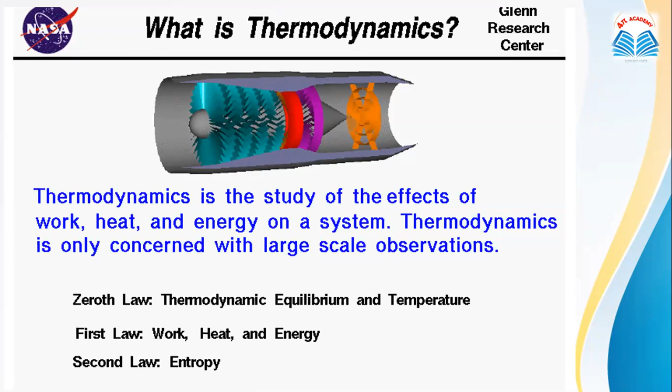So first of all, what is thermodynamics? Basically, we know that thermodynamics is that subject in which we deal with the temperature, work, heat, energy of system, etc. And we study three laws of thermodynamics: zeroth law, first law, and second law. But thermodynamics is not just this. Thermodynamics is a vast area in which we can study all about the molecules, all about their kinetics, all about the heat, all about the temperature, all about their thermodynamic function, and so on.

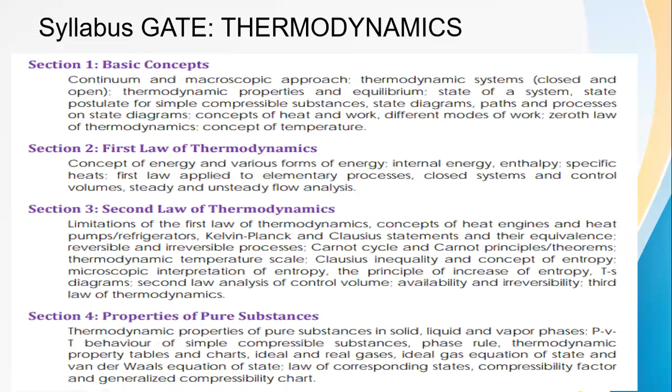And this is the syllabus of GATE, in which there are sections divided: some basic concepts, then laws of thermodynamics, then properties, then thermodynamic relations, and then thermodynamic cycles and ideal gas mixtures. So these are some topics for the exam of GATE. So basically this is the total syllabus.

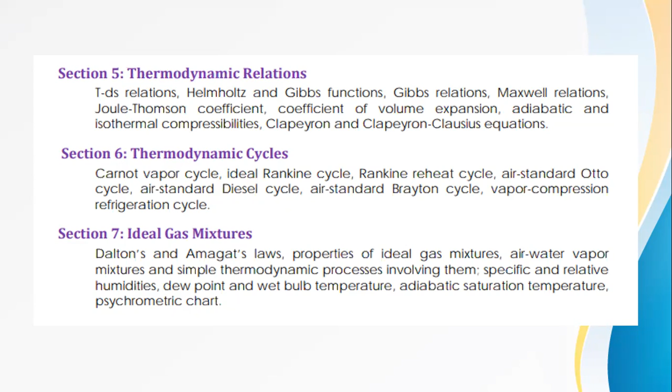Okay, so we will start with the basics of thermodynamics. Thermodynamics is based only on three things: heat, temperature, and work. So basically, heat and temperature are two different things. Some people can say temperature is a type of heat, or heat can be correlated by temperature, but no, it is not like that.

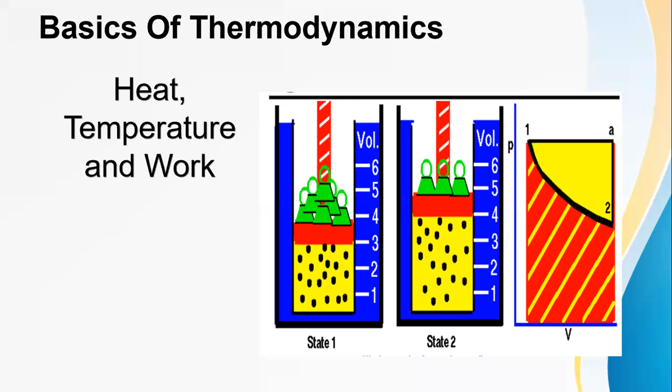Heat and temperature are very different things. So let's know how. Mechanics is a branch of physics in which we study velocity, acceleration, energy, momentum, position, etc. But we never study in mechanics about temperature or temperature function, or about diamagnetic or magnetizing behavior due to temperature and heat, and types of heat generation, heat transferring, etc. So mechanics is a different branch and thermodynamics is a different branch.

Both are parts of classical physics. Classical means the physics which Newton used to follow, Sir Newton used to follow.

Okay, so a question is, what happens to the energy of a ball when we drop it on the floor? You guys know that a ball has its energy and when we are dropping it, it has kinetic energy. But when it's stuck to the floor, where has the energy gone? What happened to the energy of the ball? So the answer is it goes into heat energy. The kinetic energy is converted, and when the ball is stuck to the floor, some heat energy is generated.

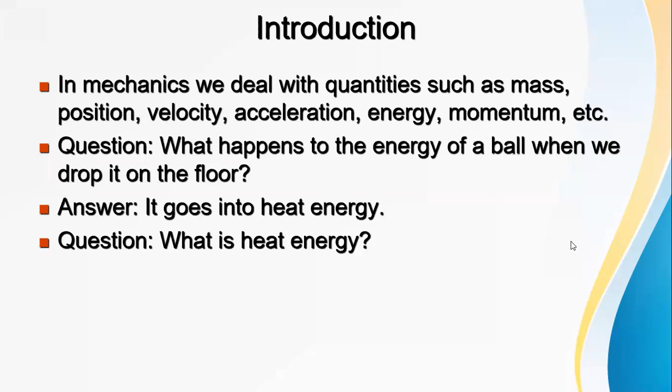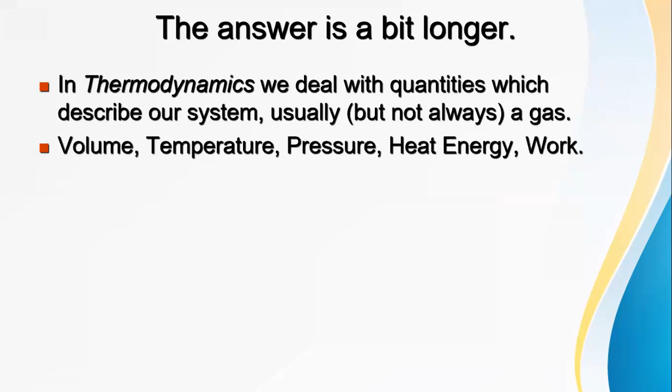So now another question arises, what is heat energy? The answer is a bit longer. Heat energy is the energy on which the whole of thermodynamics is situated. In thermodynamics, we deal with quantities like volume, temperature, pressure, heat energy, and work. So temperature and heat are two different things, as I told you earlier.

An example to explain this: maybe you guys have used a microwave oven. When you put your hand in the oven, in the hot air of the oven, your hand is not burned, but when you touch that metal rack of the oven, your hand instantly gets burned. So what is this? It means both are at the same temperature, the air in the oven and the metal rack in the oven. But when you touch the air, your hand is not burning, and when you touch the metal rack, your hand is burning.

So the answer is that they have really different energy contents. They have different powers of energy absorbing. They have different types of kinetic energy of molecules due to heat. And though the air comparatively looks cool to the hands than metal, right? And that is why this is happening.

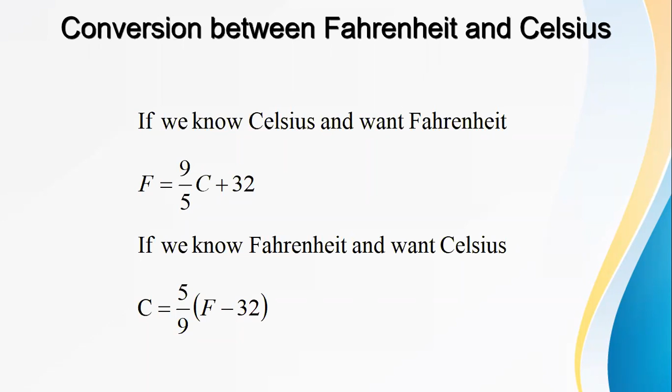So this you already know, conversion between Fahrenheit and Celsius. These are two temperature scale measurements. So some formulas are there. If we know Celsius and want Fahrenheit, then F equals 9C by 5 plus 32, and vice versa.

Now about absolute or Kelvin scale. What is absolute or Kelvin scale? The lowest possible temperature on the Celsius scale is minus 273 degrees Celsius. That minus 273 degrees Celsius is the Kelvin scale, which is 0 Kelvin or absolute zero. So in degrees it is minus 273 degrees Celsius, and in Kelvin it is 0 Kelvin. So basically absolute or Kelvin scale corresponds to minus 273 degrees Celsius.

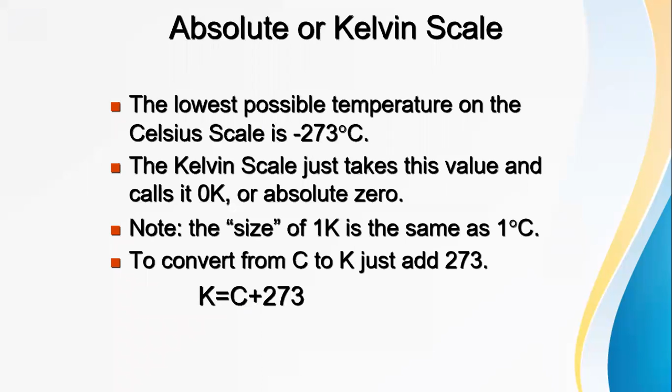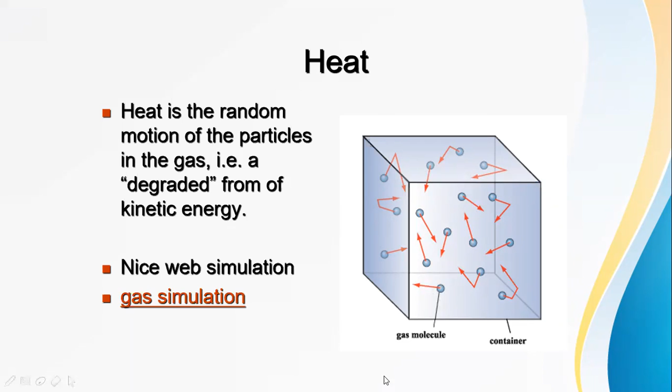So basically, in thermodynamics, we deal with gas molecules only. This is a schematic diagram of a container having gaseous molecules. So how can heat be transferred? There are three mechanisms of heat transfer: conduction, convection, and radiation.

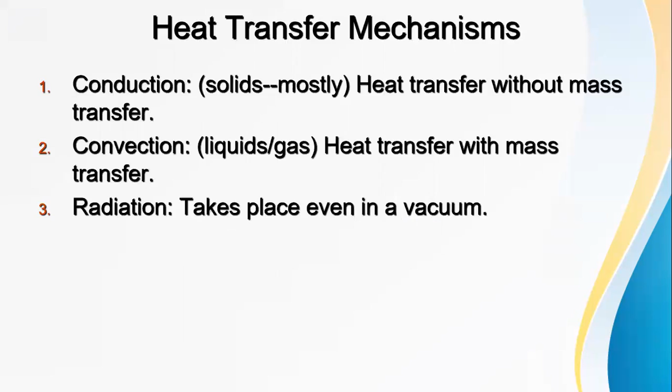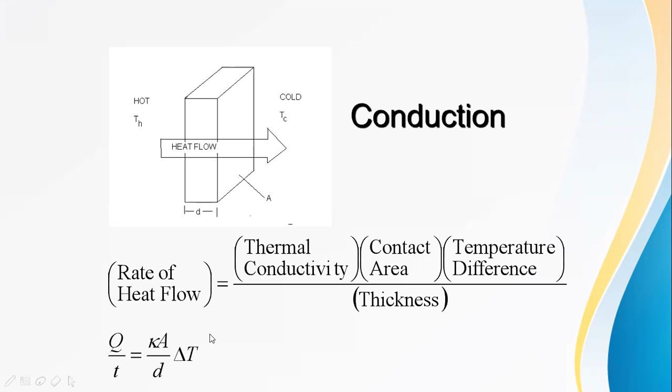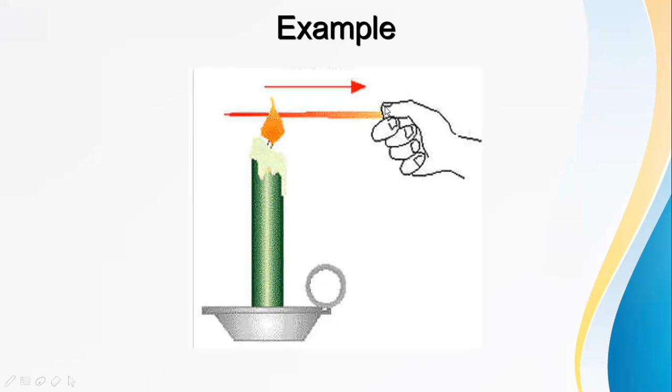So the rate of heat flow has the formula: thermal conductivity into contact area into temperature difference, over thickness. So Q over T equals K A delta T over D. This is conduction, and here is the simplest example: when you light a candle and put a metal rod from one side into the flame, it gets hotter and hotter, and after some time the other side also gets hot. This is the simplest example of conduction.

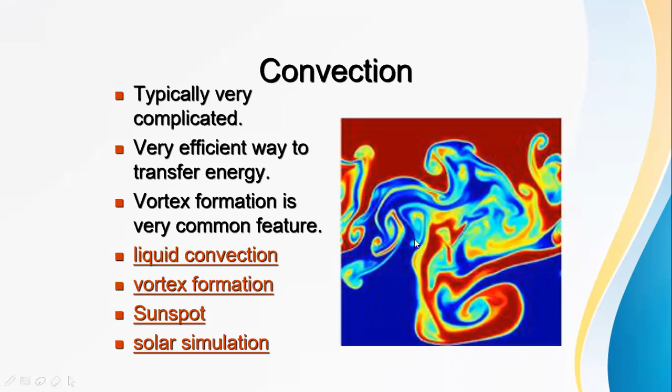Next is convection. Convection has a typically complicated formula because we can't see convection happening directly. Convection is basically seen in liquid convection, vortex formation, sunspots, solar simulations, and from these examples you can understand that convection is a typically complicated phenomenon. What is convection? Let's understand with some examples.

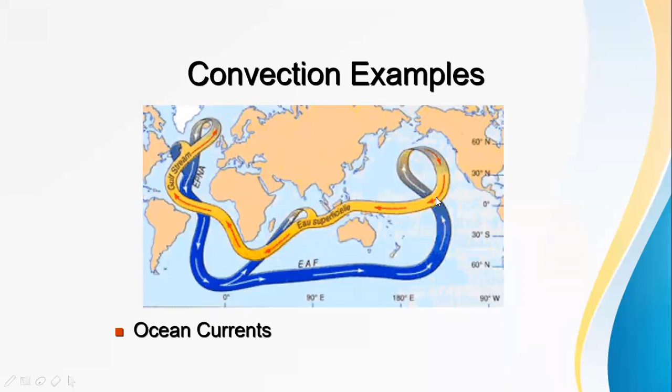Okay, so the next one is radiation. We know conduction, we know convection, now let's read about radiation. Radiation is the basic phenomenon in which everything radiates energy, maybe in the form of temperature, maybe in the form of fire, maybe in the form of light — everything that radiates energy is called radiation. So the method by which energy from the sun reaches the earth is radiation. The simplest example of radiation is sunlight reaching the earth through radiation.

Ma'am? Yes. Ma'am, one general doubt. Yes. Ma'am, suppose for example I take a material — at what temperature does it radiate its energy? What temperature, ma'am?

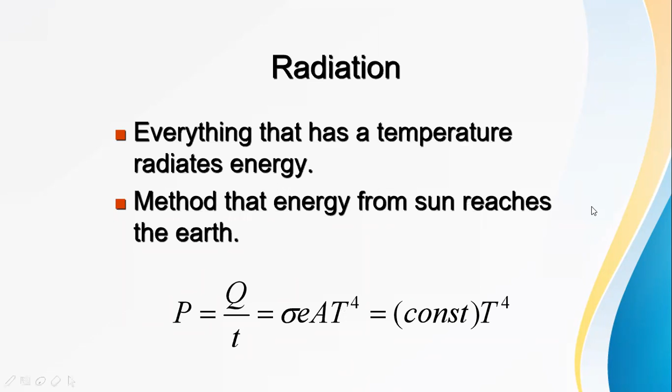The rest of you guys can see the screen, right? Yeah, we can see this. Not an issue. Yes, ma'am, we can see.

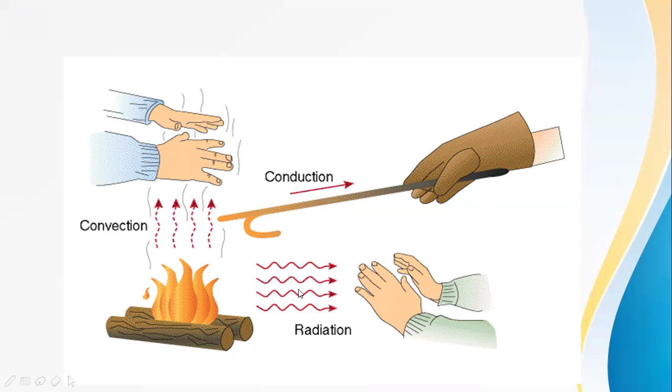So in this screen, now you can see all three in one frame. This is convection, this is conduction, and this is radiation. So now you can understand the difference between these three.

Next, let's move to the next topic. Our topic is isolated, closed, and open systems.

So what is an isolated system? In my language, an isolated system is like a box of wood. When we put a box of wood in sun heat and put some chocolate inside, the chocolate will not melt for a long while, because the box of wood absorbs comparatively less sunlight. Instead, when we put a box of steel with chocolate inside it in the sunlight, the chocolate starts melting soon.

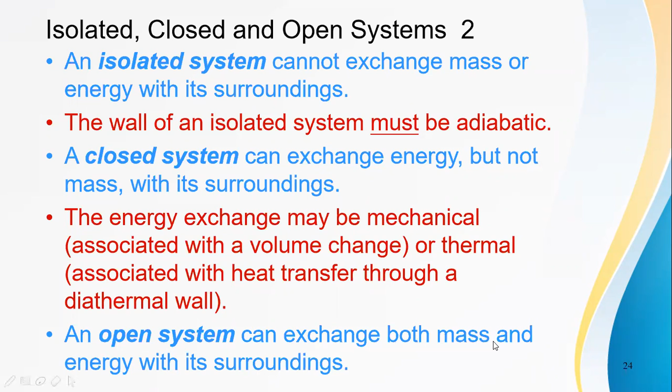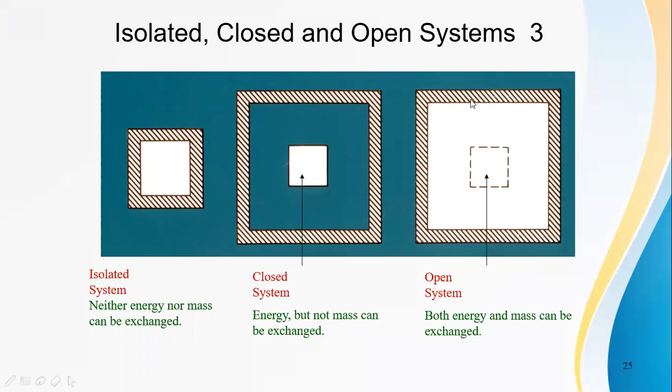Okay, let's learn thermodynamics. First, studying about the zeroth law of thermodynamics, thermal equilibrium. Thermal equilibrium is when warm and cool objects are placed in thermal contact, it is like a state of constant heat or temperature.

Based upon that thermal equilibrium, what we are doing in this law: we have three systems A, B, and C, or three objects having temperature A, temperature B, and temperature C. When two objects A and B are at equilibrium, and A is also in equilibrium with C, then automatically object B will be in thermal equilibrium with C. So this is the basics of the zeroth law.

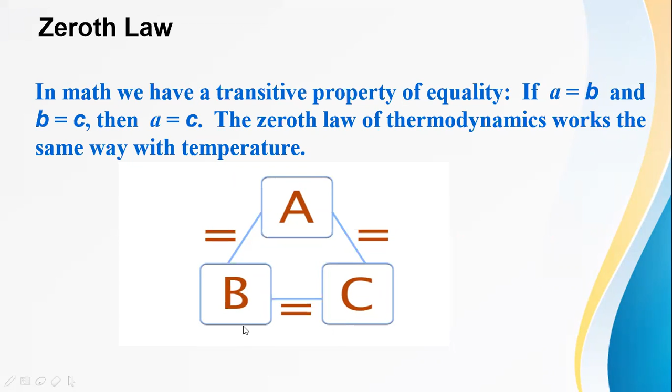What is it saying? It is saying if object A is having thermal equilibrium with B, and A is also having thermal equilibrium with another system C, then B and C will automatically be in thermal equilibrium with each other. So the zeroth law of thermodynamics works the same way with temperature. This is the phenomena of temperature.

Some thermodynamic variables we will study now because we are moving ahead to the first law of thermodynamics. Before studying the first law, we should know there are some macroscopic or microscopic variables. The main variables are P, V, and T. The whole of thermodynamics depends upon pressure, volume, and temperature. If these variables are used to describe an equilibrium state of a system, they are known as state variables. So pressure, volume, and temperature are state variables, because we use them to describe an equilibrium state of any system.

There are two types of variables: extensive and intensive. Extensive variables depend on the size of the system, like mass, volume, entropy, etc. Intensive variables do not depend on the size of the system, like pressure, temperature, magnetic field, etc.

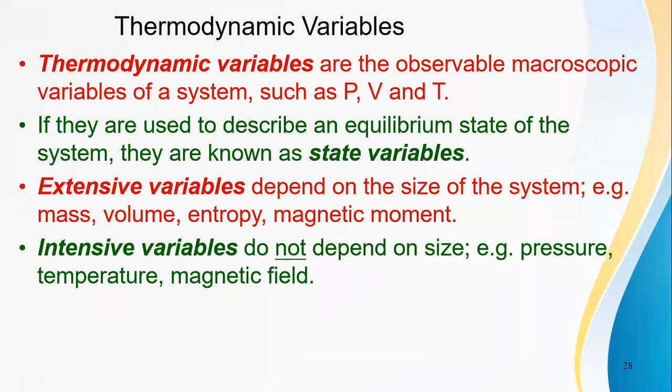And there are three types of processes also: isothermal process, adiabatic process, and free expansion. First of all, what is an isothermal process? There are some more processes also, I will tell you later.

What is an isothermal process? It is a process in which temperature is constant. We put some gas in a heat bath or reservoir at any temperature, and we do not increase or decrease its temperature. So this is called an isothermal process.

Adiabatic process is when we are increasing the pressure on the gas using a piston, so the gas is compressing. This type of process is called an adiabatic process.

Adiabatic expansion is when, by lowering the temperature, the gas is expanding, but there is no relation with its surroundings - the system is totally insulated. So this is adiabatic expansion. These are the three main types of processes.

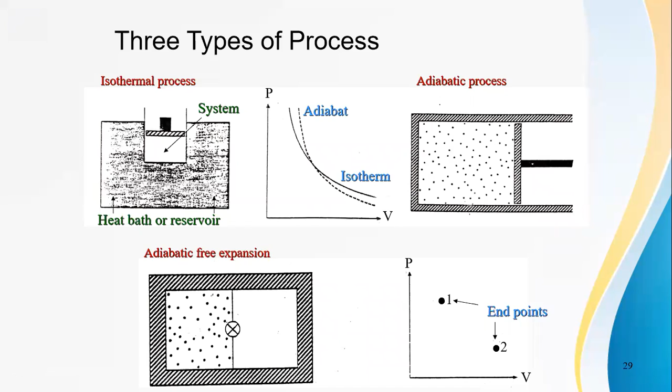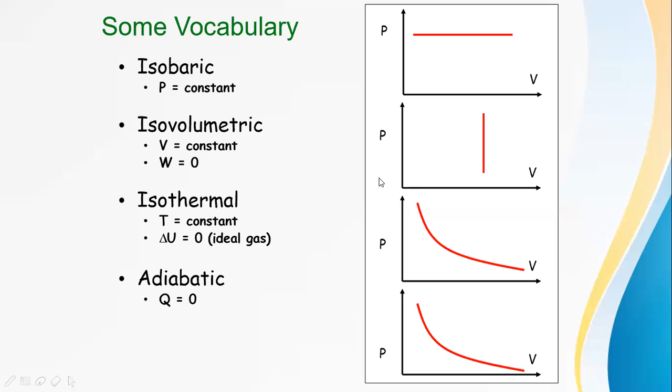Ma'am, your voice is not clear. Guys, can you hear Monica ma'am? Yes, yes ma'am, there's so much distortion in your voice. It's not audible, ma'am. Okay.

PV diagrams. Okay, let me make you understand these diagrams. When work is done by the gas, W by the gas is the area under the curve, meaning the path moves to the right, from this side to this side. Okay, this is work by the gas.

And when work is done on the gas, the path moves to the left, meaning minus the area under the curve. So we move from this side to this side, downwards. So basically, work on the gas equals minus work by the gas. We should keep this in mind.

Now, work from closed cycles: when the cycle is clockwise, meaning from A to B and B to A, then this area should be this blue circle side. This is a clockwise cycle.

Then work is positive. When we move counterclockwise from A to B and B to A, then work is negative, meaning negative of the area. And when we talk about closed cycles, the change in internal energy will always be zero.

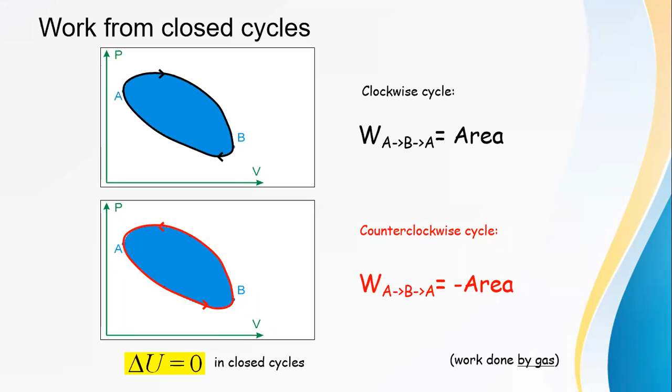So change in internal energy is zero in a closed cycle, whether it is work done by the gas or work done on the gas. So here is example A. Consider an ideal gas undergoing the trajectory shown in the PV diagram. Going from A to B to C, the work done by the gas is: greater than 0, less than 0, or equal to 0? What should come here?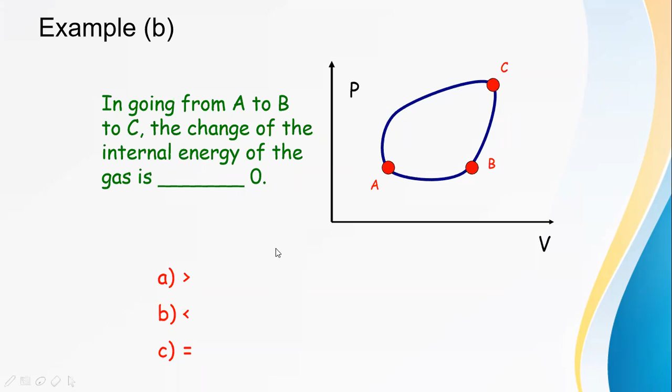Okay, another example: going from A to B to C, the change in internal energy of the gas is greater than 0, less than 0, or equal to 0? Greater than 0. Good, good, let's move ahead.

Now, internal energy in a cyclic thermodynamic process is always equal to 0.

Okay, now let us talk about the sign convention of thermodynamic work, and work in various processes - we will derive work in isobaric, isochoric, and isothermal processes.

Now you guys know that work done by the system is positive, and work done on the system is negative. In a cyclic process, clockwise we consider positive work, and anticlockwise we consider negative work.

Now, a reversible isochoric process gives work equal to 0. Why? Because in an isochoric process, volume is constant, so change in volume should be 0. And since W equals P dV, pressure times change in volume, when change in volume is 0, work is also 0.

Next is the isobaric process. Here we write work as W equals P delta V, meaning P times (V2 minus V1), going from higher volume to lower volume while pressure stays the same. So it's P(V2 - V1), and these results hold for all materials, whether it is plastic, steel, iron, or whatever.

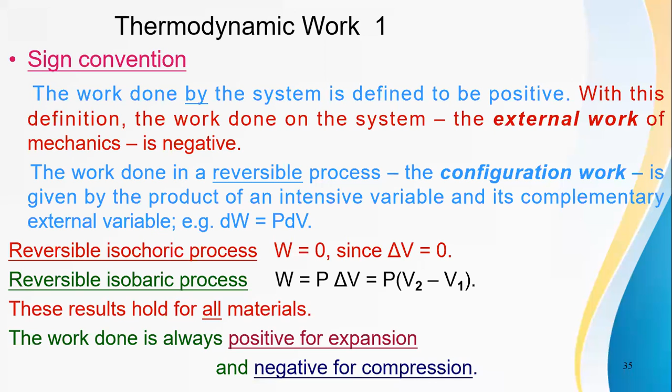Work done is always positive for expansion. When gas is expanding, we consider the work done as positive. And it is negative for compression. When gas is compressing, we consider the work done as negative.

Now we will talk about the isobaric process from this diagram. This is P, and isobaric process is happening, so we will write W equals to P(V2 minus V1). This is V2, the higher one, and this is V1.

Now when we talk about the isothermal process, it looks like this slope on the graph. The total area covered is the work done in the isothermal process. So the expression for work in isothermal process is W equals integral of P dV, equals to nRT integral of dV over V.

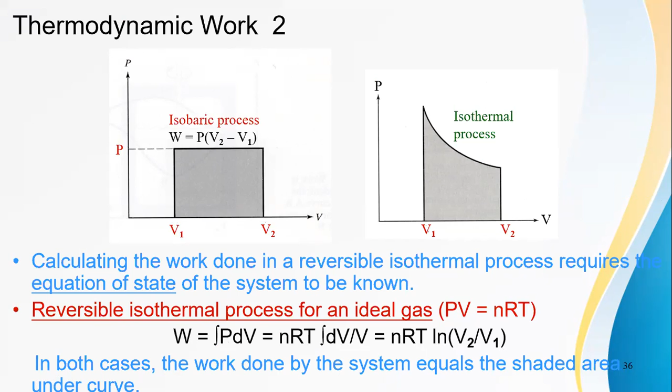Why am I writing P dV as this? Because P equals nRT upon V, from the ideal gas state equation PV equals nRT. So this becomes nRT, and integrating 1 over V with respect to volume, we get ln(V2 over V1). So this is the work done for the isothermal process, for ideal gases.

Let's move ahead to example number C. Quickly reply with these answers. We are considering a monoatomic ideal gas, with the gas state equation PV equals nRT. Just consider n equals to 1.

What work was done by the gas from A to B? This is point A, this is point B, and when we talk about A to B, the whole area covered by A to B is the total work done. So can anyone tell me the answer for part A?

Let me solve this here. We will consider this whole area, from here to here, and apply the simplest method: just subtract 75 and 25, which gives us 50. So we get our pressure, which is 50 kilopascal. And P delta V: delta V is the change in volume, which is 0.6 minus 0.2, that is 0.4. When you multiply this, you get 20, which is 20 kilopascal meter cube. Pascal into meter cube is joule.

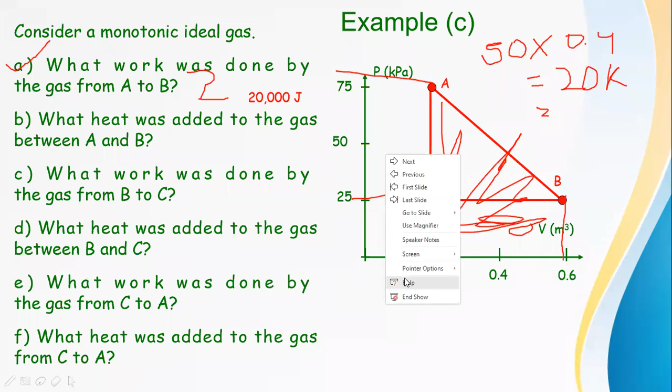Yes ma'am, very well. Okay, now what heat was added to the gas between A and B? Students, when the examiner asks for the heat added to the gas, the answer will be the same as the work done. So the work done is 20,000 joule, so the heat added will also be 20,000 joule.

Now for part C: what work was done by the gas from B to C? Just tell me the answer quickly. Ma'am, I think it's 10,000 joule. Okay, next D: minus 10. Ma'am, it's also 10,000 joule.

I think heat added is the same as work done. No, that's not correct, because A to B is an isothermal process and B to C is an isobaric process. Sorry, let me write down all the answers. You will work through these after I provide the same PDF to you, and the recording of the lecture will also be provided so you can see these answers later.

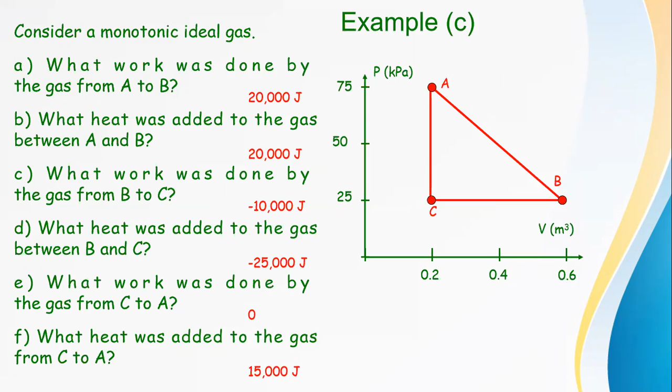Now let's move to the next slide, two questions are left. What was the total work done by the gas in the cycle? So total work done will be derived from A to B, then B to C, then C to A, and we add them all to get 10,000 joule.

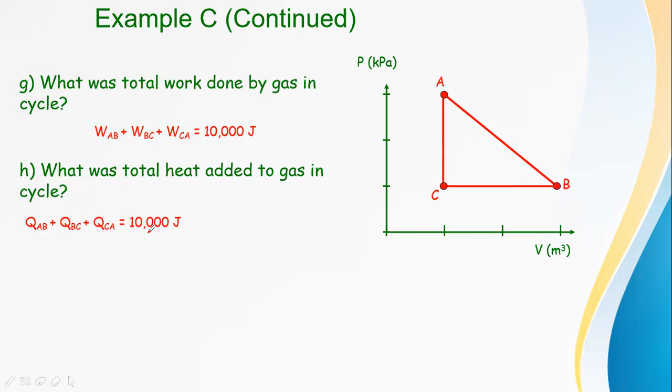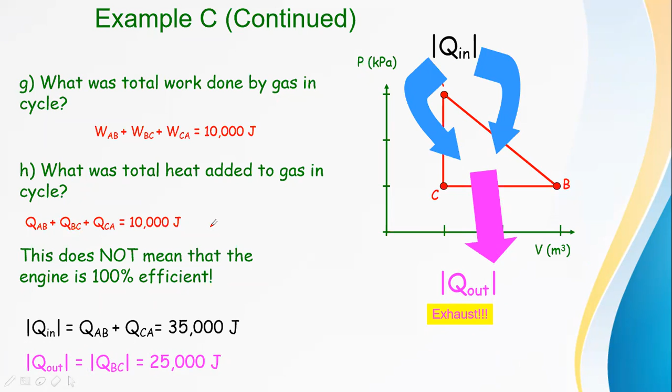And for total heat added, we do the same: Q(A to B) plus Q(B to C) plus Q(C to A). How do we know if heat is added or absorbed? We give heat in through process A to B, but from B to C, heat is coming out. So we are getting Q in equals to 35,000 joule, Q out equals to 25,000 joule, and thus the total heat will be 10,000 joule only. I guess you guys understand this phenomenon.

Now, work done by the gas. Basically, work is force into distance, so force into the distance covered by this force is work. Force is pressure into area, so pressure is P, area is A into delta Y, where delta Y is the mean length changed. So A delta Y becomes delta V, and what we get is W equals to P delta V. So this expression is coming from here.

Let's move to the first law of thermodynamics. The first law of thermodynamics is Q equals to delta U plus W. Change in internal energy plus work done is equal to the total heat. This is the first law of thermodynamics.

So in the first law, we will use the differential form only, because we will apply this differential form in many phenomena in thermodynamics. The differential form of the first law is dU equals to dQ minus dW. These dU, dQ, dW are differentials, and dU is an exact differential because U is a state variable. dQ and dW are inexact differentials because Q and W are not state variables. I've told you this thing earlier. These are some exact differentials and so on.

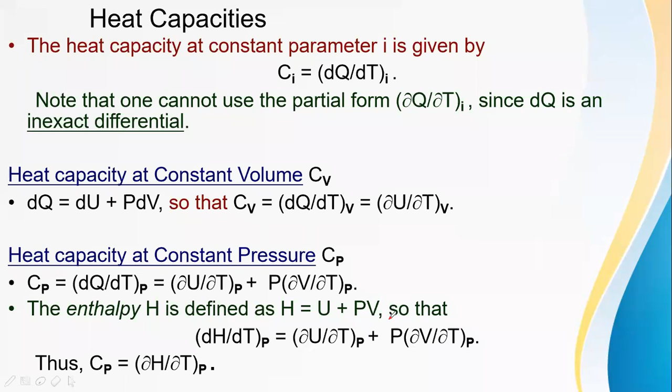Heat capacity at constant pressure is Cp. Cp is dq over dT at constant pressure, and enthalpy is H equals to U plus PV. So enthalpy, entropy, these things we will study later.

So we know about two specific heats, Cp and Cv, and the ratio of these specific heats is gamma equals to Cp upon Cv. For a reversible process, dU is dq minus PdV, and for an adiabatic process, we know dq equals to 0, so this dq is gone. So dU equals to minus PdV.

All these things are for ideal gases. We are considering the gas as an ideal gas. So for an ideal gas, U equals to U of T, because internal energy is a function of temperature, so Cv equals to dU over dT.

Now PV equals to nRT, and H equals to U plus PV. So U is a function of temperature, and P and V are state variables, so enthalpy will also be a function of temperature. So H equals to H of T.

So what can Cp be? Cp also can be dH over dT. This is the Mayer relation, which you guys have studied in the 11th standard. Cp minus Cv equals to nR, which is known as the Mayer equation.

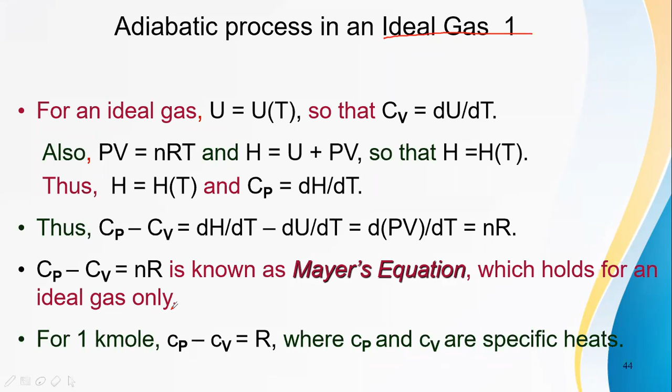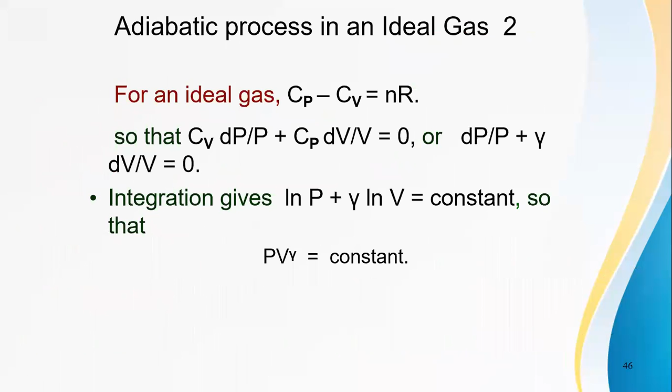And this also holds for an ideal gas only. If we put n equals to 1 mole or 1 kilomole, Cp minus Cv will become R. You know Cp and Cv are specific heats. So the adiabatic process follows dq equals to 0, so dU equals to minus PdV, and these are some formulas.

So these are some formula slides you can see later on. This is work done in an adiabatic process. There are two methods to derive this. The first one is direct integration. For a reversible adiabatic process, we know PV raised to the power gamma equals to K, and as the process is reversible, W equals to the integral of PdV.

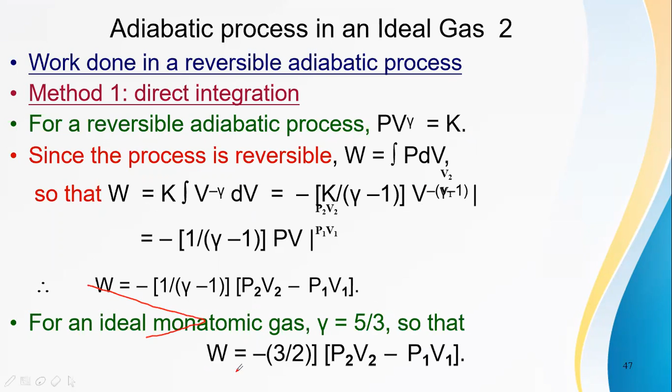What we will do is put the value of P, which will be K upon V raised to the power gamma, and do the integration. What we get is W equals to minus 1 upon gamma minus 1, times P2V2 minus P1V1. Now for an ideal monoatomic gas, gamma equals to 5 by 3, so it will be W equals to minus 3 by 2, times P2V2 minus P1V1.

The second method to derive the work done in a reversible adiabatic process is from the first law of thermodynamics. We know that W equals to Q minus delta U, and in an adiabatic process Q equals to 0, so W will be minus delta U, and delta U is Cv delta T. So we can write it as nCv times T2 minus T1.

So W will be minus nCv(T2 minus T1). We know that the state equation of ideal gas is PV equals nRT. So W will be minus Cv upon R times (P2V2 minus P1V1), and finally we apply the Mayer relation, putting the values of Cp and Cv, and apply the ratio gamma. What do we get? We get the same relation. So these are the two methods to derive the work done for a reversible adiabatic process.

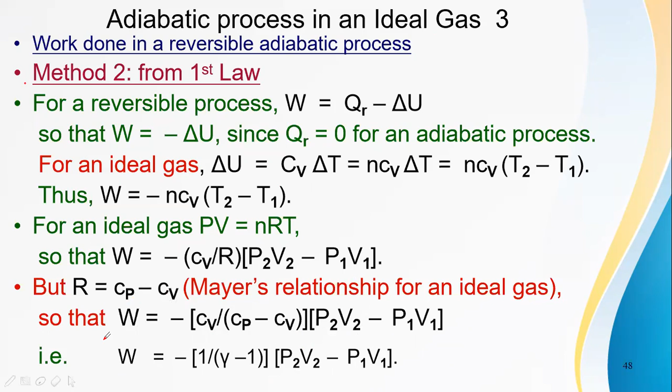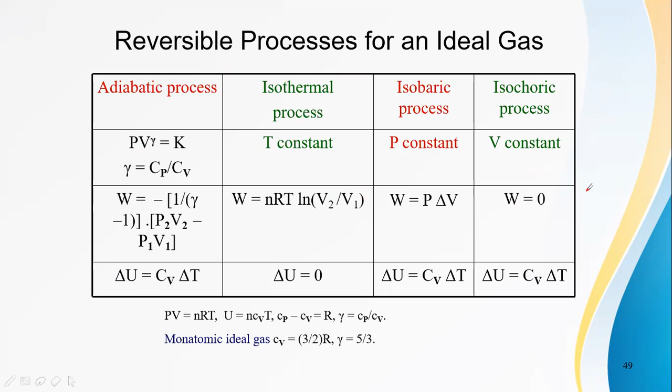So these are the reversible processes for an ideal gas. In a table I have summarized them for adiabatic, isothermal, isobaric, and isochoric processes. Isothermal has T constant, isobaric has P constant, isochoric has V constant, and in adiabatic process Q is 0. In adiabatic process the state equation is PV^gamma equals K, where gamma is Cp upon Cv. Work done is given. The isothermal process follows this work done formula. Isobaric process W equals P delta V, isochoric W equals 0. This is the table you guys can remember or summarize in your notes, read them, and solve the questions.

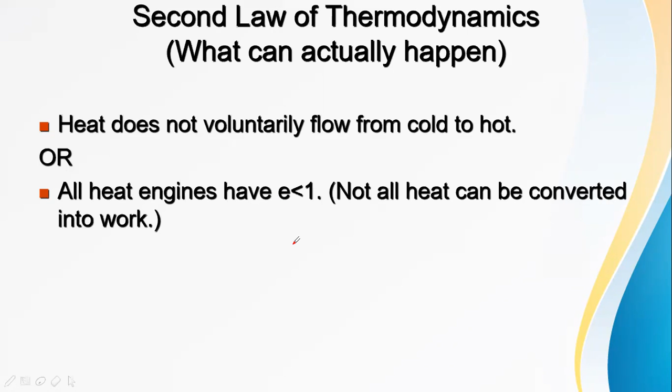So let us move to the second law of thermodynamics. Basically, heat does not voluntarily flow from cold to hot. We know that heat can't voluntarily flow from a colder section to a hotter one. Also, all heat engines have efficiency less than 1, meaning they cannot convert all the heat into work. We know that some heat is always wasted. So this is the basics of the second law of thermodynamics: how can we make heat flow from colder section to hotter one. This is the second law of thermodynamics, in which we follow the concept of entropy.

So here a new phenomenon comes, which is entropy: delta S equals delta Q over T. Entropy is basically the measurement of disorder. It is a thermodynamic variable, and when any system is reversible, the initial and final state entropy change used to be 0, and when it is irreversible, then the final state entropy is always greater.

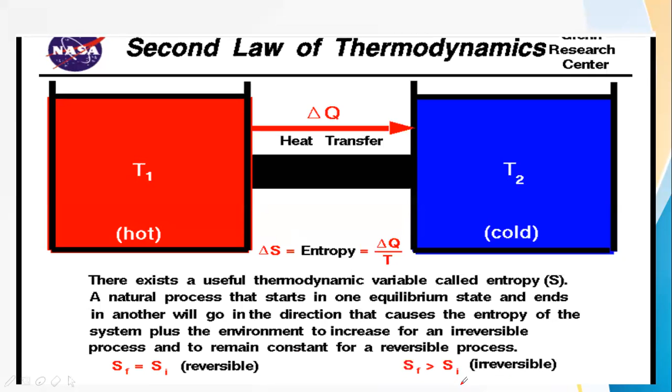So the second law follows two statements, Clausius and Kelvin statements. These are the two statements. I know you have read them in earlier classes also, in 11th standard or at graduation level. So these statements are just following the concept of change in entropy.

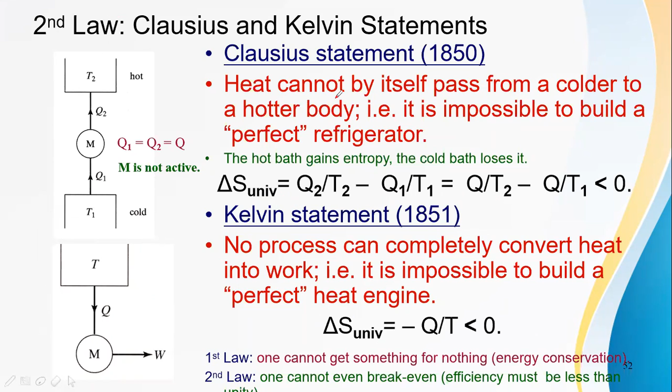What the Clausius statement says is that delta S universe equals Q2 upon T2 minus Q1 upon T1, and if Q1 and Q2 are equal, then it is less than 0. What the Kelvin statement says is delta S universe equals minus Q over T, which is also less than 0. In this diagram I have shown the heat engines. Now we will talk about heat engines in the next slide. So these are the two basic statements of the second law of thermodynamics.

So let's come to the cyclic heat engine. The concept of cyclic heat engine comes out from the second law of thermodynamics, which is delta S universe equals delta S plus delta S dash, where S is entropy of system and S dash is entropy of surrounding. Delta S means the entropy of the system is changing, delta S dash means the entropy of the surrounding is also changing, and the entropy of the universe is increasing with time. We can't decrease the entropy of the system by any method.

So the cyclic heat engine follows the same concept. After one cycle, delta S universe will be greater than or equal to 0. After another cycle, it will also be the same. So this is the heat engine in which there is a hot reservoir and a cold reservoir, and heat flows from hotter to colder section. So the mechanism is that when heat is flowing from this side to that side, by some mechanism we are getting some work.

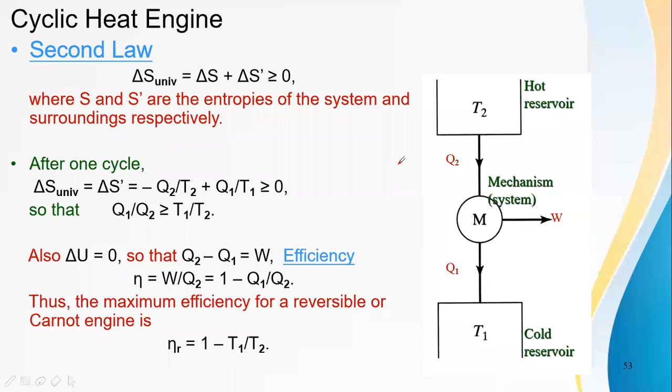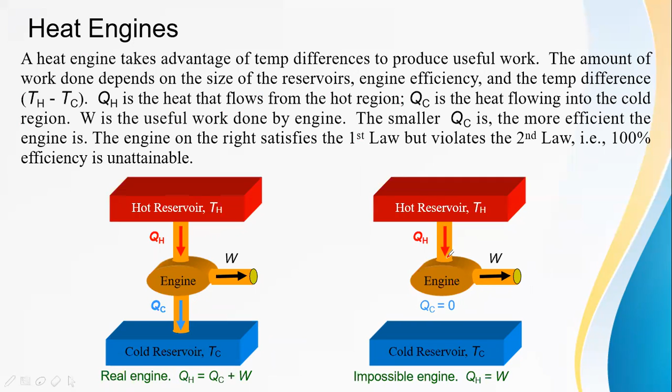So this is the basic phenomenon of any cyclic heat engine. Basically heat engines are categorized into two parts: real heat engines and impossible heat engines, shown in these diagrams. Real heat engines are those in which QH equals QC plus W. QH is the energy for the hotter section and QC is the energy for the colder section. Impossible engines are like when we get heat from a hot reservoir and convert all the heat into work, so QC is always 0. This is impossible; we can't convert all the input into output, there is always some wastage along the process. So this is the model heat engine in which Q hot equals W plus Q cold, so Q hot minus Q cold equals W.

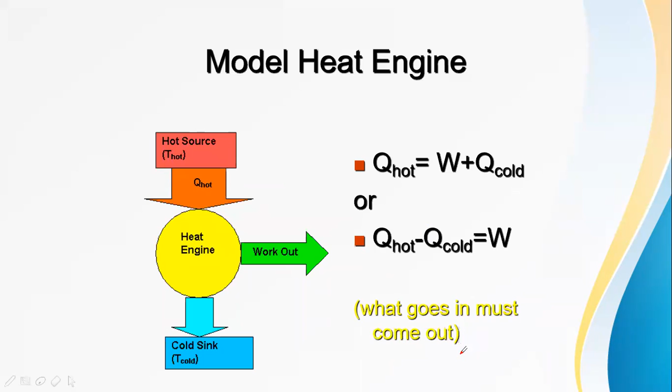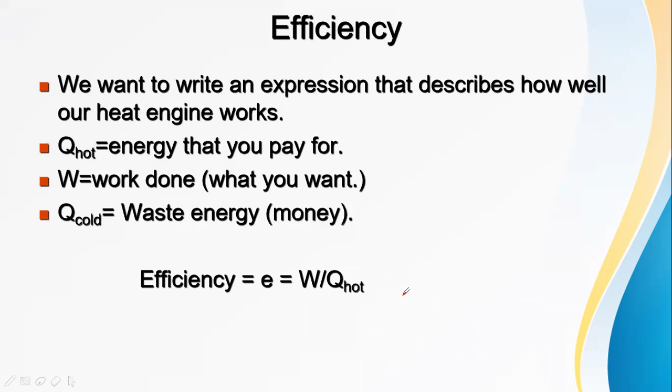So what goes in must come out. This is the basic phenomena of a heat engine. The efficiency of a heat engine is E equals W upon Q hot, where Q cold is waste energy, as I told you earlier. So we know E equals W upon Q hot, and we write W as Q hot minus Q cold. So it becomes E equals 1 minus Q cold over Q hot. This is the simple expression for efficiency. Real engines have efficiencies between 0 and 1.

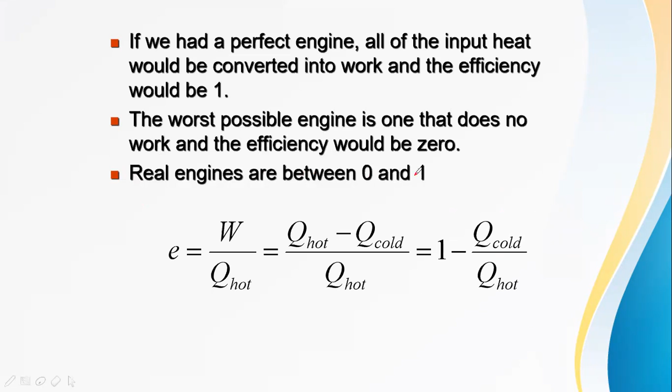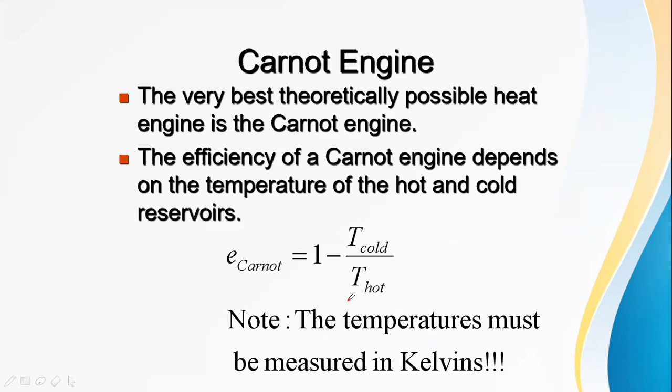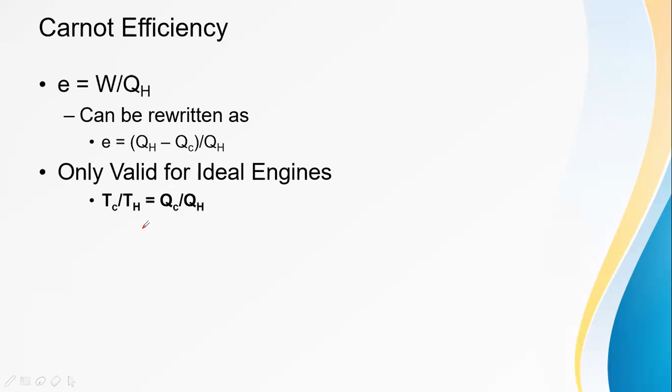So basically, when we write Carnot efficiency in percentage format, we just convert it into 100%. Like if we get the value of E as 0.31, then we write 31% Carnot efficiency, and so on. So the input temperature is TH, heat input from here, and the output temperature is TC, we get the heat output from here.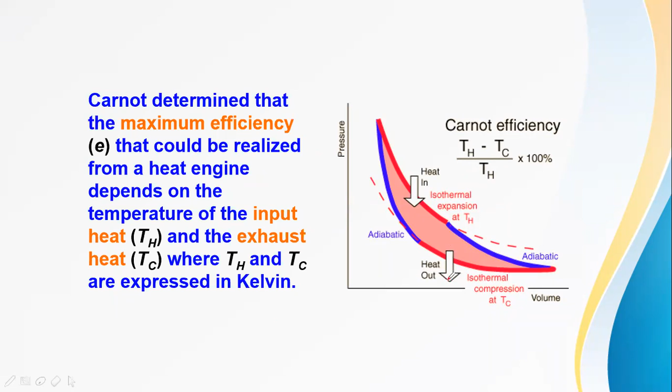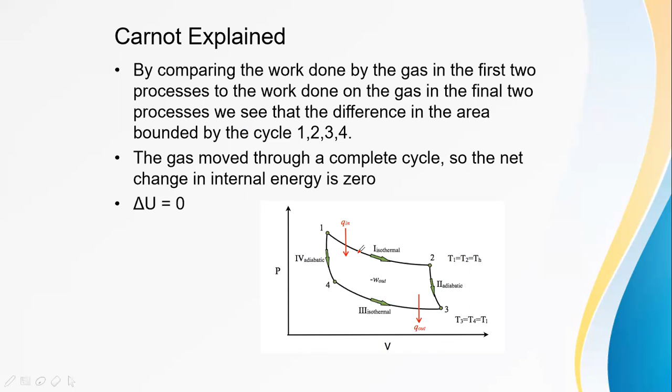And Carnot explained some phenomena, like by comparing the work done by the gas in the first two processes, the work done on the gas in the final two processes is the difference in area, 1, 2, 3, 4, having 4 different areas. So we get 4 different values of W, the work done. And delta U is always 0 because the Carnot cycle is a cyclic process, and in a cyclic process there is no change in internal energy. Okay, so this thing you already know.

This is the Carnot impossibility. What is that? If E equals 100%, let us assume any Carnot cycle having 100% efficiency, then delta U equals 0. And if delta U equals 0, then delta S equals 0. So is it possible to have delta S equals 0, meaning the change in entropy is 0? No, that is not possible, because we know from the second law of thermodynamics that entropy is increasing and we can't decrease it. So delta S should not equal 0, and that is why the efficiency of any Carnot cycle can't be equal to 100%. So this is the Carnot impossibility.

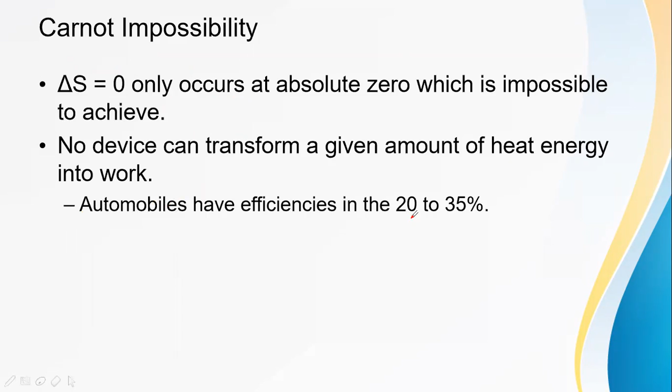And delta S equals 0 only occurs at absolute zero, which is impossible to achieve. So no device can transform a given amount of heat energy completely into work. Automobiles have efficiencies in the range of 20 to 35%. The automobiles which we use have efficiency between 20 to 35%.

This is the next example. What is the maximum efficiency possible of an engine that operates between 500 degrees centigrade and 250 degrees centigrade? So efficiency, you know the formula E equals 1 minus TC upon TH. You will just put these into Kelvin scale, convert 500 and 250 degrees centigrade into Kelvin scale, and derive the answer. Can anyone tell me what will be the answer? Please unmute your mics and reply fast.

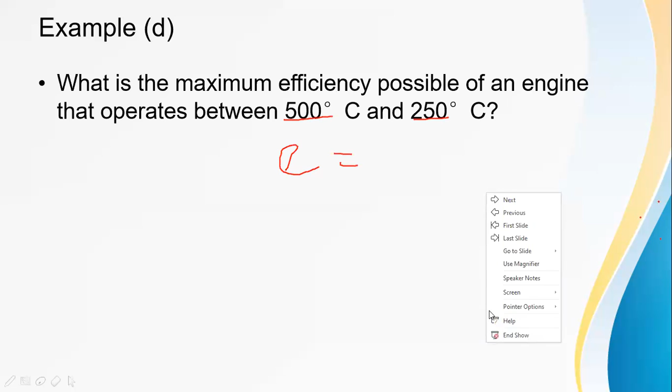Yes, I can hear you. Ma'am, if T2 by T1 is equal to, I think, 33%. Nearly, approximately 30, nearly 33. So the answer will be 32 to 33%.

Then efficiency, ma'am, efficiency is equal to 1 minus T2 by T1. So 1 minus 33, how can we then? No, I think you are mistaking somewhere. Check again.

Okay, I'm moving ahead. This is very easy, you can do this later on. Now the next example: the exhaust temperature of a heat engine is 240 degrees centigrade. The engine produces 500 joules of work and has a Carnot efficiency of 45%. So what is the temperature of the heat source?

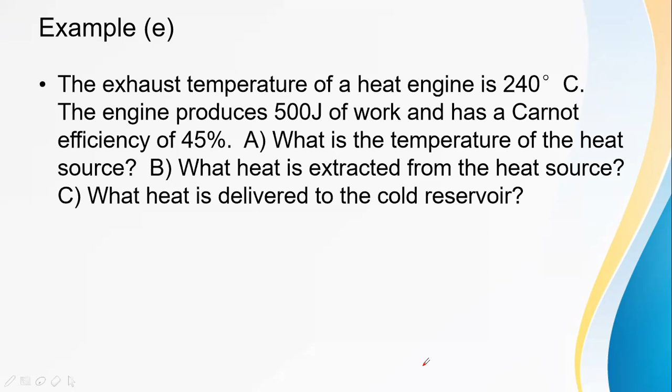So here we will have to derive TH, the temperature of the higher hot reservoir, and what heat is extracted from the heat source, QH, and what heat is delivered to the cold reservoir, QC. So these three answers we will derive, and you will derive these three answers.

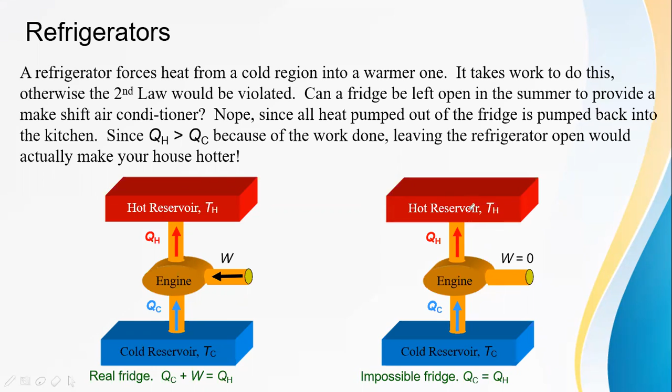And impossible fridges are those in which we put some heat and all the heat is converted into output without doing any work, meaning W should be 0. This is the impossible phenomena. By any means, we can't do this - we can't do no work and still get some output. So the real fridges are these and impossible fridges are these. This is the basic phenomena of refrigerators.

When we talk about efficiency of Carnot cycle, we write E, and when we talk about efficiency of refrigerator, we write kappa, COP, which is Q upon W. And the most efficient is Carnot refrigerator: COP cooling is less than COP Carnot. So highest COP for small temperature differences.

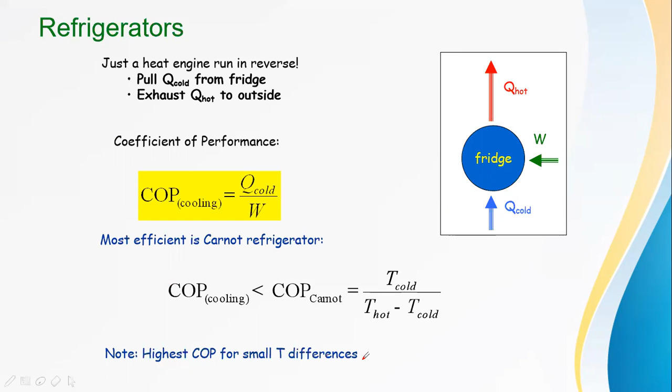These are some basic things. Okay, these are some questions which I have taken from previous year papers of CSIR-NET and GATE. So I will provide you the answers here only.

The question is: delta W be the work done in a quasi-static reversible thermodynamic process. The following statement about delta W is correct, and there are 4 options. So the question is, in any quasi-static reversible thermodynamic process, delta W is denoting the work done. So what is the correct statement about delta W?

Delta W is a perfect differential if the process is isothermal. Delta W is a perfect differential if the process is adiabatic. Delta W is always a perfect differential, and delta W can't be a perfect differential.

This is a question from NET December 2012, and here is the answer: work done is a perfect differential in an adiabatic process. So when we talk about adiabatic process, we just put work done as a perfect differential.

Yes? Ma'am, what is quasi-static? Okay, quasi-static process is that process which is moving ahead gradually, when we are not talking about equilibrium but near to the equilibrium. Any system that starts reaching equilibrium but anyhow is unable to reach equilibrium, then that state is called quasi-static - near to the equilibrium, next to constant.

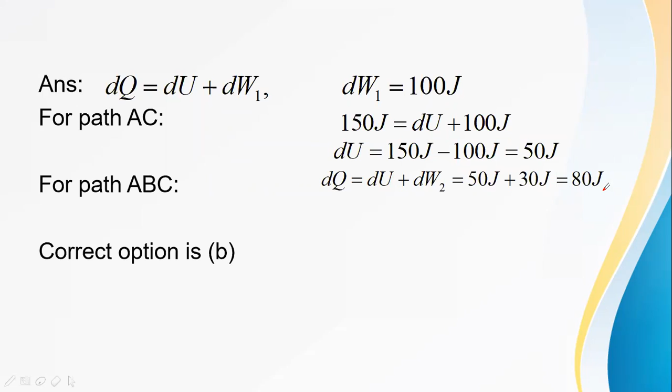The answer is even simpler. We follow the first law of thermodynamics, dQ equals dU plus dW. For the first path, dW is 100 joules, so we can derive dU, which comes out to 50 joules. Now we put the value of dU for the second path and get dQ, which is 80 joules. So the correct option is B, 80 joules. The question was simple and the answer was even simpler.

Next question: a Carnot cycle operates as a heat engine between two bodies of equal heat capacity until their temperatures become equal. If the initial temperatures of the bodies are T1 and T2 respectively, with T1 greater than T2, then their common final temperature is? This question is from NET December 2013, and the answer is given.

Since the Carnot cycle is a reversible cycle, entropy change is 0. Let the equilibrium temperature be T, then delta S equals C integral dT over T, since delta S equals dQ upon T. So we write this equal to 0. If you integrate this, you can derive the answer: T equals square root of T1 T2. So the correct option is C.

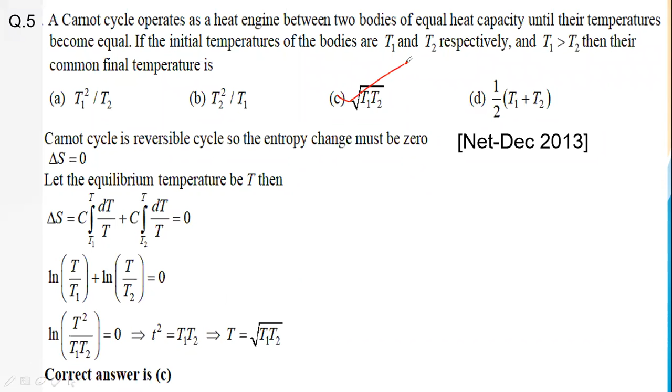Next question: when a gas expands adiabatically from volume V1 to V2 by a quasi-static process, meaning near equilibrium, it cools from temperature T1 to T2. If the same process is carried out adiabatically and irreversibly, T2 dash is the temperature of the gas when it has equilibrated. There are four options.

A gas is expanding adiabatically by a quasi-static process, cooling from T1 to T2. Now the same gas undergoes the same process adiabatically but irreversibly, reaching temperature T2 dash. At equilibrium, we derive the relation between T2 dash, T1, T2, V1 and V2. This question is from CSIR-NET December 2014. It looks complicated, but it is not. The answer is 2: T2 dash will be greater than T2.

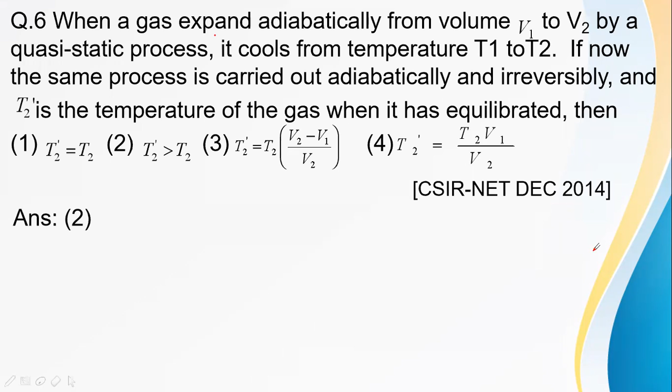Here is how: we follow the first law of thermodynamics, Q equals delta U plus W. In an adiabatic process, Q is 0. So 0 equals delta U plus W, meaning delta U equals minus W.

The work done in an adiabatic reversible process is greater than the work done in an adiabatic irreversible process. So we can directly write T2 dash is greater than T2. This means the temperature in an irreversible process is always greater than the temperature in a reversible process. These three points you should note down.

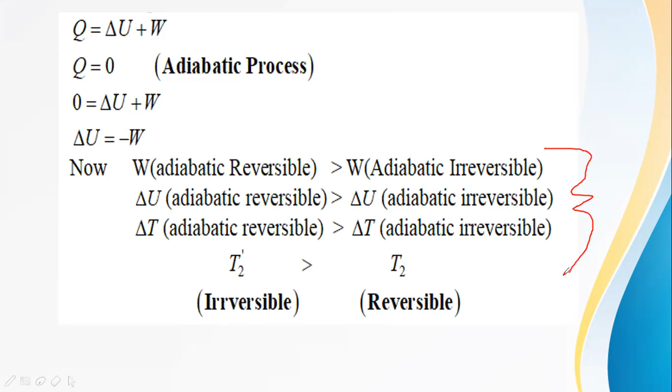Heat removed from inside the refrigerator is Q2. The heat capacity given is 4.2 kilojoule per Kelvin, that is Cp, and delta T is the difference in temperature, from 18 degree to 17 degree. So we get Q2 equals 4.2 kilojoule.